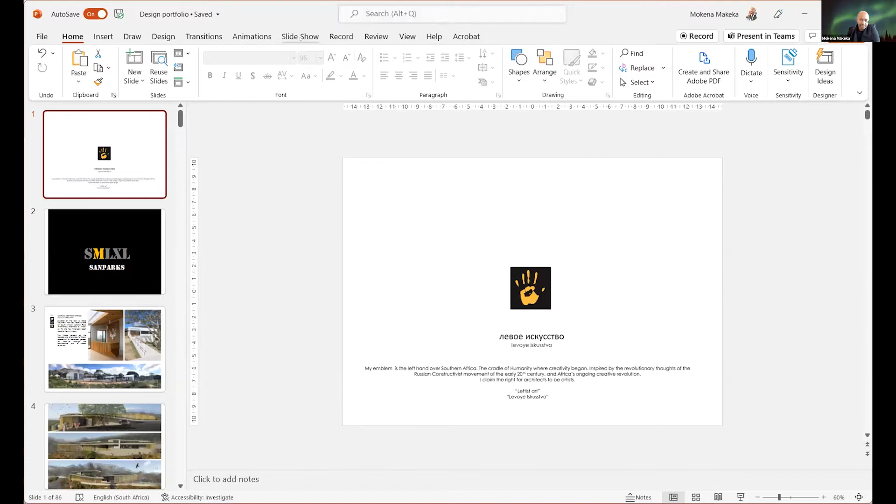I thought that I would locate the discussion really in the context of the work that I've done. These ideas are not necessarily definitive about what public space looks like on the African continent, but definitely a particular perspective, and that'll be unpacked as we go forward.

Just to locate my logo, it's a left-hand symbol over Southern Africa, with the country of Lesotho also denoted there. It's partly because in many ways there are arguments that show this is where the cradle of humanity began, and there's a whole lecture that I actually give around the origin of creative thought and abstract thinking and writing, and how that is basically the origin of architecture if we think about Plato's cave, etc.

But really what anchors it for me is this phrase "Levoye Iskusstvo," which is actually a Russian constructivist statement, meaning leftist art. It came out of the early 20th century, and it was really a statement about the right for architecture to be radical, to be inventive, to be provocative, and to be very thoughtful.

Obviously this came on the back of the Bolshevik Revolution, and I thought there were many similarities between this and my experience in post-1994 South Africa, where we were caught up in this wave of trying to reinvent a South African identity, and to many extents contributing to the larger puzzle of what an African identity looks like, particularly in terms of artistic production.

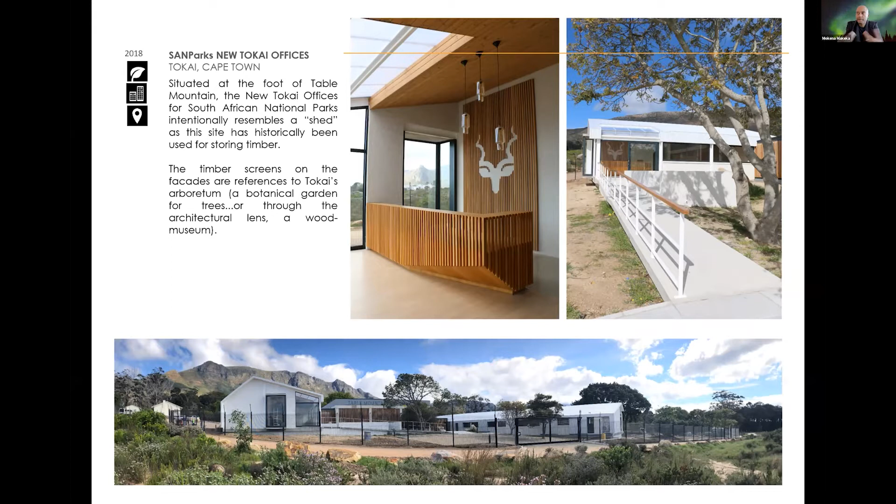Some people in SANParks believe that the building should disappear into the landscape, that it shouldn't be visible, because that would be the appropriate public gesture. I made a counter argument largely around climate change and heat reflection. I wanted a white building, which also had a strong relationship to the Cape Dutch vernacular architecture, but more importantly, that to be public doesn't mean to be invisible. So that was another subtext in terms of the architectural narrative.

Eventually, we found that the client felt this was still too organic a building conception, and they had a public debate about what SANParks would look like in the public domain if we pursued that direction. So we came up with a very different strategy, still centered around a courtyard, using rectangular shapes to create both internal and external public space.

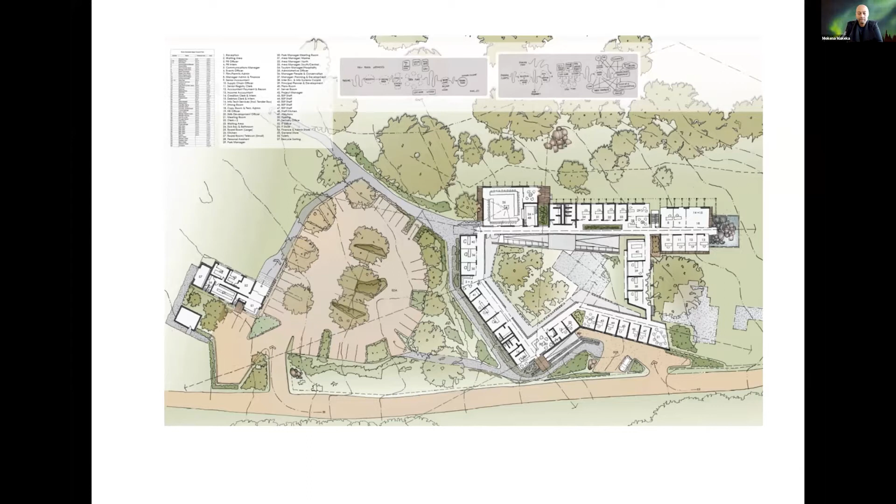Something to mention is that this building is located in a place prone to attacks by baboons, which happens quite a bit. There was an interesting tension because SANParks positions itself as being part of nature, but the subtext of the architectural brief was actually to be apart from nature, closed off from context and somewhat privatized. This project was fascinating because of that tension between public and private.

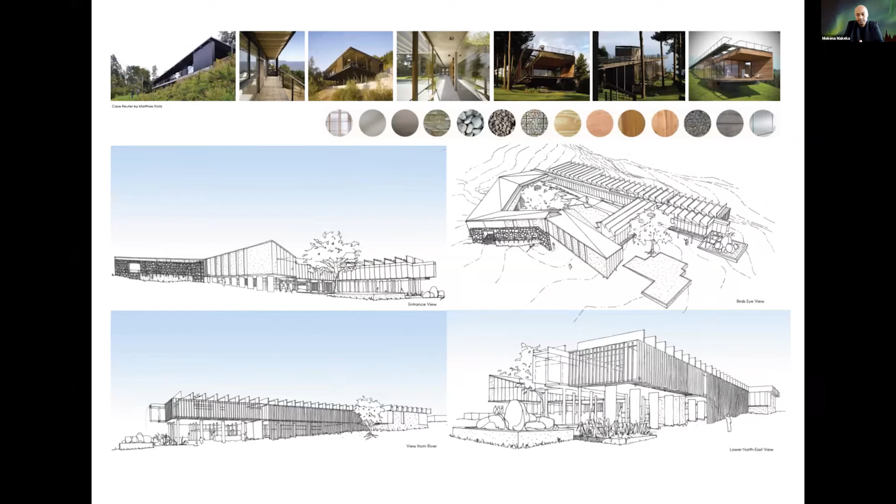This is design iteration number 2, where you can start to see the geometries and language of the building take on a different cadence, still very much an abstract linear element in the landscape. That was an interesting journey from an institutional point of view.

The next project I'll share is MODILA. I founded this Museum of Design, Innovation, Leadership, and Art a couple of years ago. It was a precursor of another museum I'll share shortly. The argument was about how we take public art and public architecture and project it through a museum of design, particularly because Africa globally isn't necessarily associated with design or museums that project the future.

When people think of Africa, they think of Africa in the past, not in a future sense. So what I decided to do quite deliberately was be provocative about these sorts of tropes.

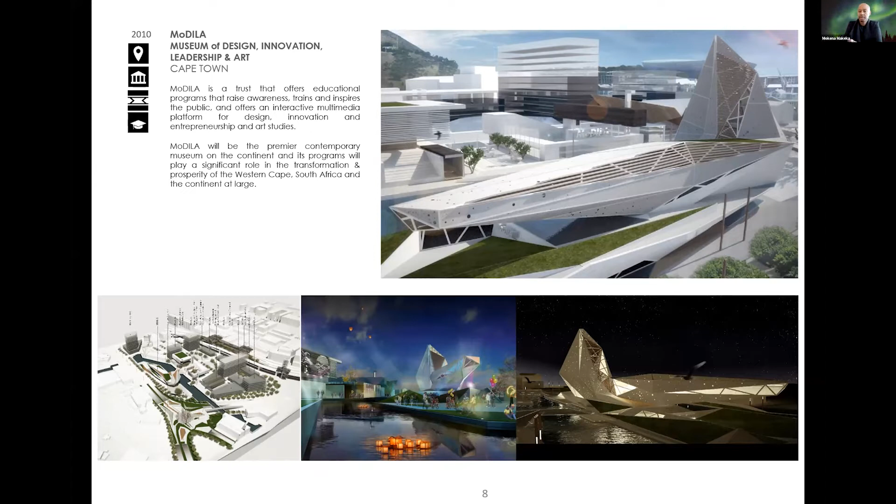The building was inspired by an African star constellation, the Silema constellation, which was pixelated and run through a parametric program to form the apertures on the building. The form is a crystalline structure, reflective of the crystal granite composition of Table Mountain. I wanted to make a deliberate statement that architecture in Africa doesn't have to be nostalgic or trapped in the past—that we can claim the future through our architectural production.

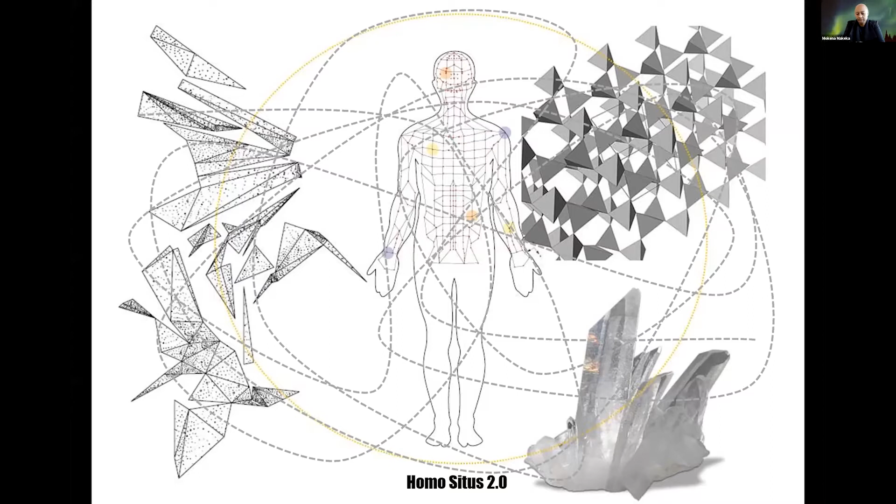This phrase, Homo situs 2.0, comes from an amazing Moroccan philosopher who unfortunately died, Zaoual, who spoke about Homo situs—the idea of situated man, or situated humanity, that what makes a human being is their specific context and location. I took this idea and overlaid it with the question of urban acupuncture at the scale of the body, while imagining the body also as the city.

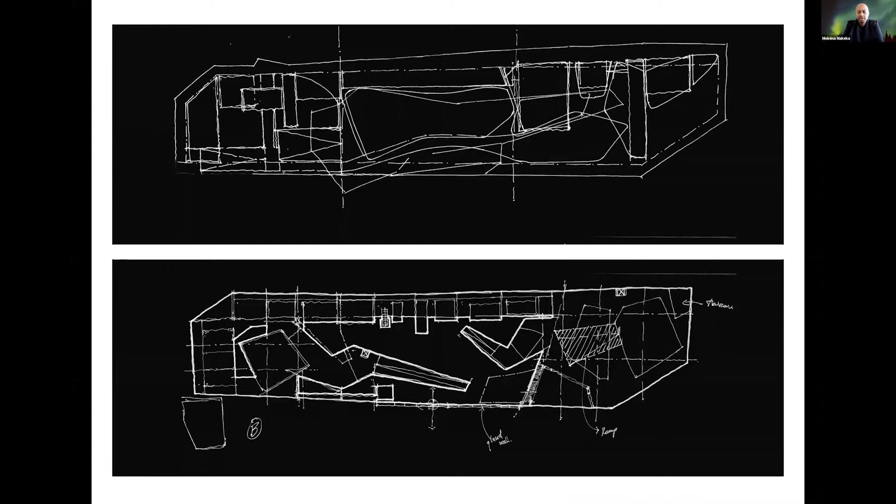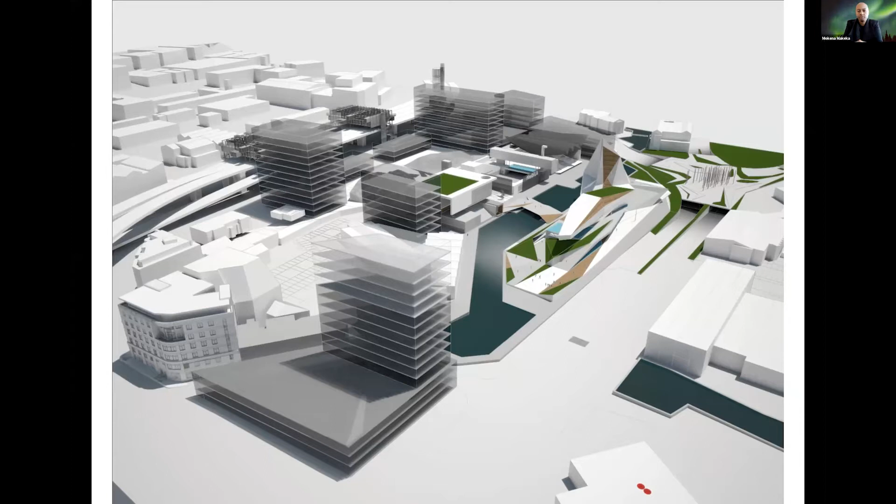These fractal, unfolded geometries coming from the crystalline structure became a determinant behind the design. The layout sits on a very narrow site, roughly 45 meters wide by about 220 meters long—very linear conditions. The interior spaces are a series of fractal geometries occupying the internal space.

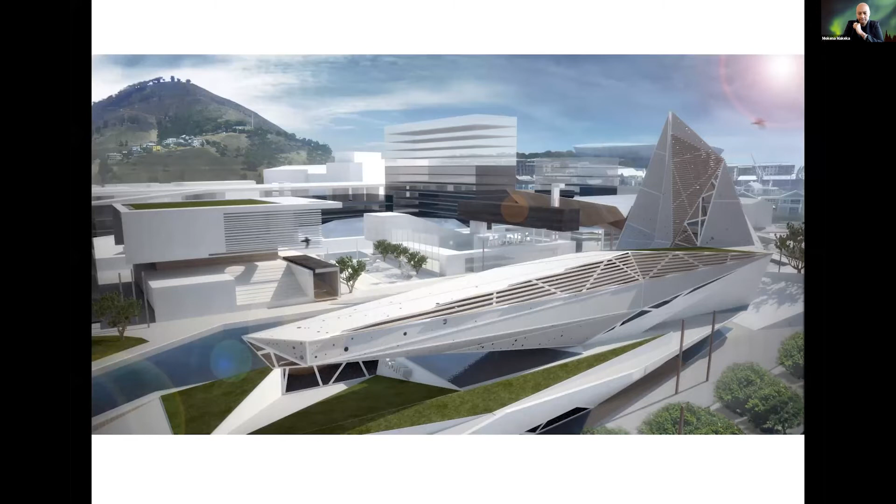Surrounding it, I developed a more traditional urban design framework of buildings that would offset the cost of producing the museum. There was a whole business exercise looking at how much revenue could be generated by unlocking real estate in the surrounding area, and how that capital could subsidize the museum itself. Here are some close-up renders of the building, and that's it in context on the site.

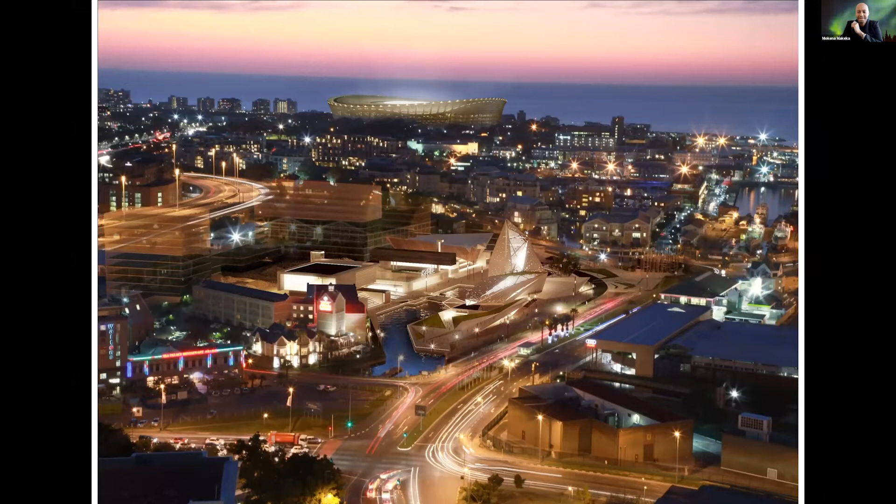The landowner chose to put up an office block on the site, so you're not able to find this building there. This is one of these interesting explorations of the architect, which didn't realize fruition.

The next one I wanted to share is the East Pier Precinct. This is a portion also in Cape Town, close to the V&A Waterfront, which is probably Africa's most successful tourism facility, with millions of people coming there every year—more than come to the pyramids in Giza, which maybe speaks a lot about consumerism and our conception of public art and heritage, but that's a different takeaway.

With this opportunity, this part of the V&A Waterfront, the waterfront as a whole, was always seen as separate to the city, not part of the public realm. They on hand said that they actually see themselves as an extension of the urban fabric. So when this opportunity came up to create new infrastructure at the tail end of the harbor, it started to trigger opportunities for what a new public building could look like.

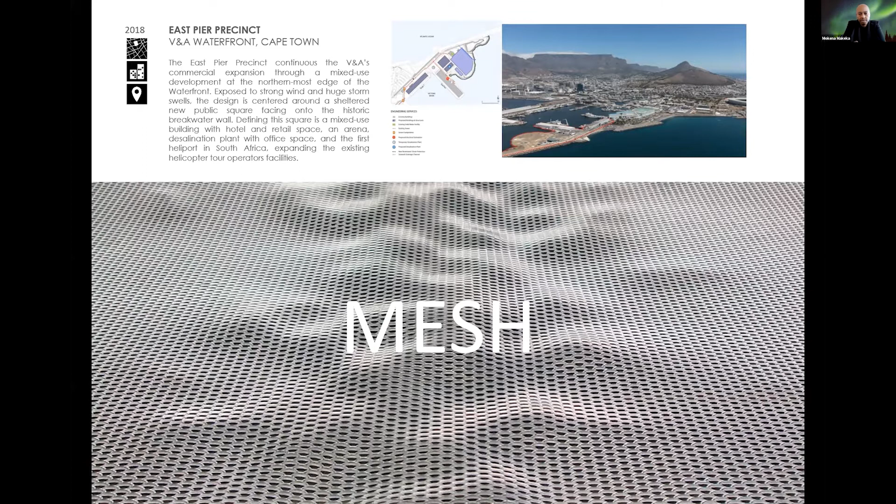I was asked to design a theater multi-purpose facility that would essentially extend the public realm right to the edge of the water. So there was an urban design framework, as you can see, with different components and activities that I'd allocated.

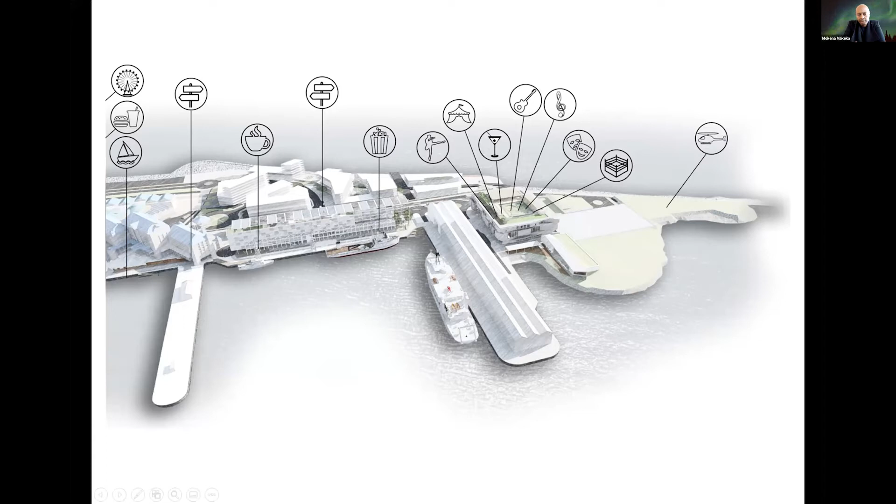Here you'll see the building on the right-hand side, which I called Scenarium. Scenarium was also this play on the notion of seeing and being seen. So I said it's not an auditorium, it's not just a music hall—it's a Scenarium, but it's a place of performance and engagement.

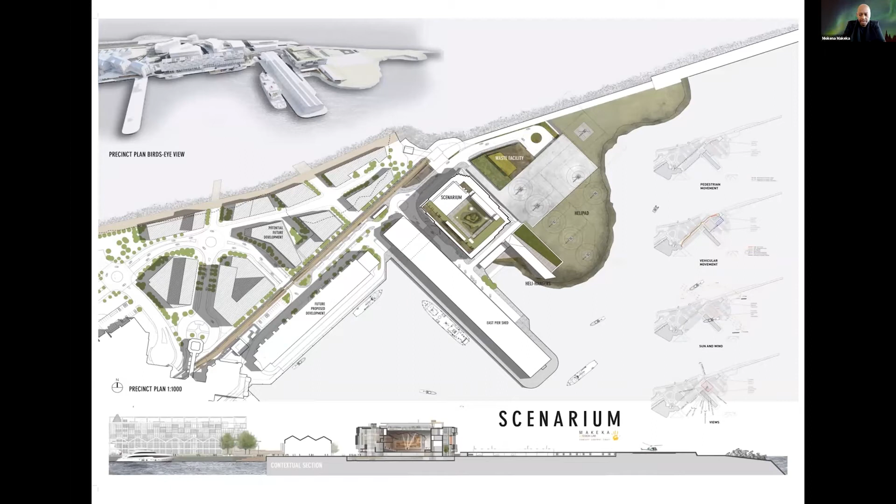The way this building works is that it essentially has a skin, a sort of brise-soleil that wraps around it, but it's actually fractalized—partly because there's an adjacent helicopter port next to it. So we had to break down the decibel volume of the helicopters so the interior spaces could still be functional, and there's a series of unfolding spaces within the design itself.

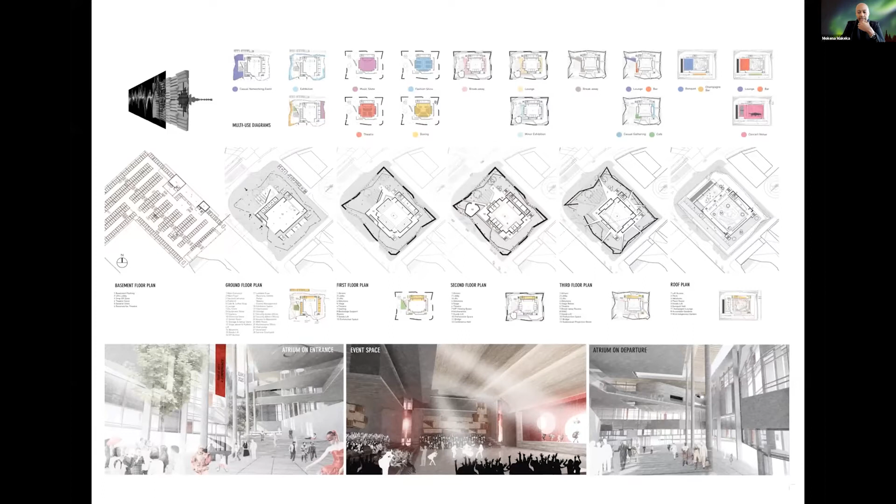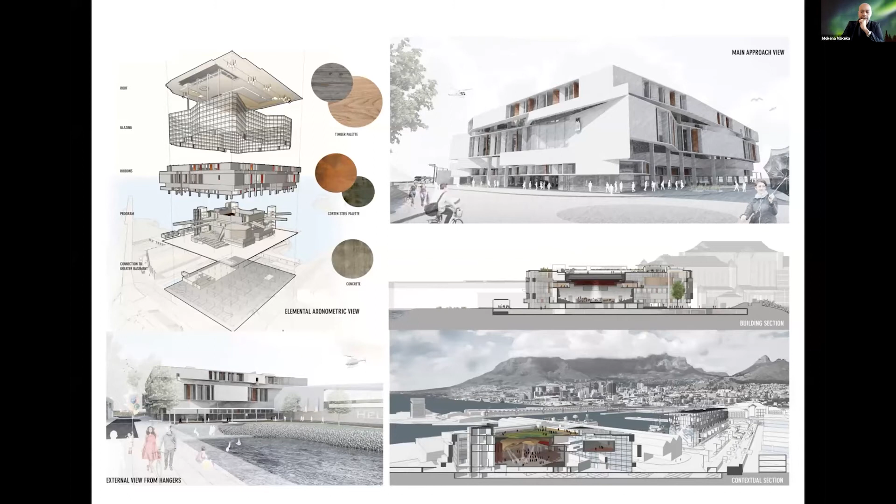Greenpoint Stadium—now, I was also shortlisted to do a design for the World Cup when South Africa was hosting. As you know, every country gets the opportunity to either refurbish their stadiums or create new ones. Cape Town decided to create a new one, and we were part of a shortlisted competition.

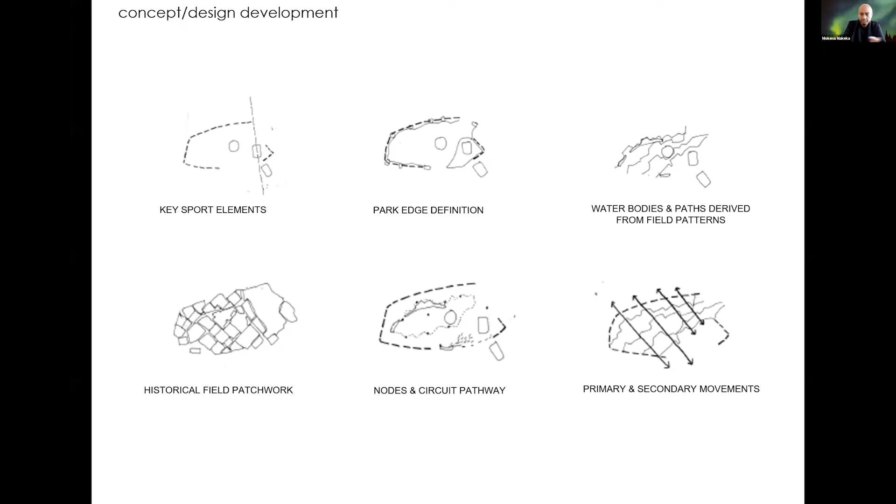The site was quite interesting because Greenpoint Common, if you will, was a site with a whole range of histories. It was used as a concentration camp during the time of Queen Victoria, a place of lots of conflict where indigenous people were also held against their free will. Currently it was a marketplace at the time, and it also has this relationship towards Robben Island.

Robben Island is fairly famous in South Africa's landscape because that's the place where Nelson Mandela and many other people were imprisoned—not just recently, but it's always been a place of imprisonment for the last couple hundred years. So this was a site where I was quite intrigued about how we map a stadium and sport in connection with heritage and so on.

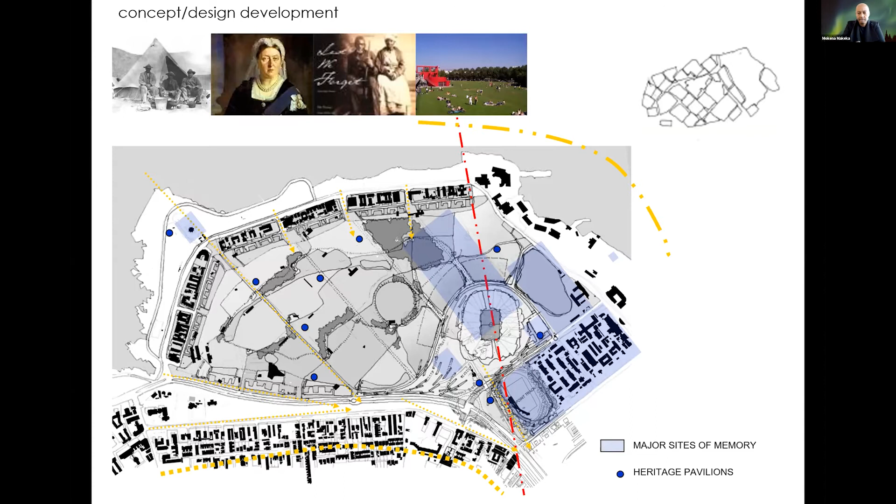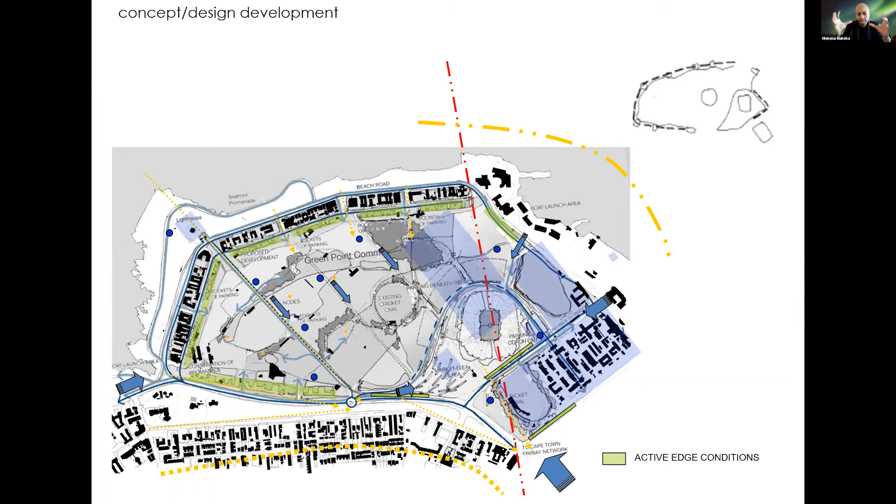It's also about this public space and public imagination of history, which created a framework for how the urban landscape would work. That red diagonal line actually connects all the way to Robben Island. The yellow crescent is where some of the major vistas are, on the outside of the space. Because the whole public park is lined by housing on the outer edge, it creates a sort of cloistered mega urban room, if you will.

And then, of course, a series of green spaces layering. Here's the schematic diagram of what the stadium did.

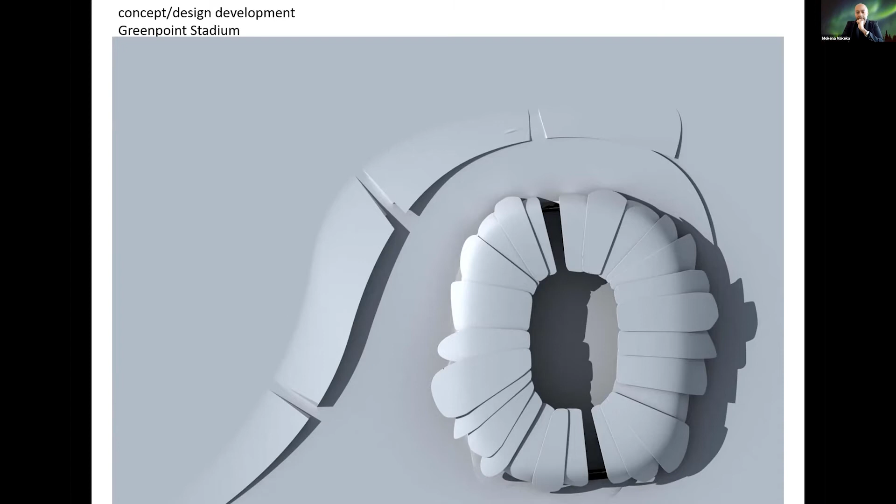It's actually quite a radical design, because what I did is split the stadium in two, so that when you're inside the public arena of the stadium, you're constantly aware of Robben Island. It's a way of connecting the inside to outside. Most stadiums are entirely enclosed spaces—they don't have a relationship to the context once you're inside, because of the importance of the spectacle.

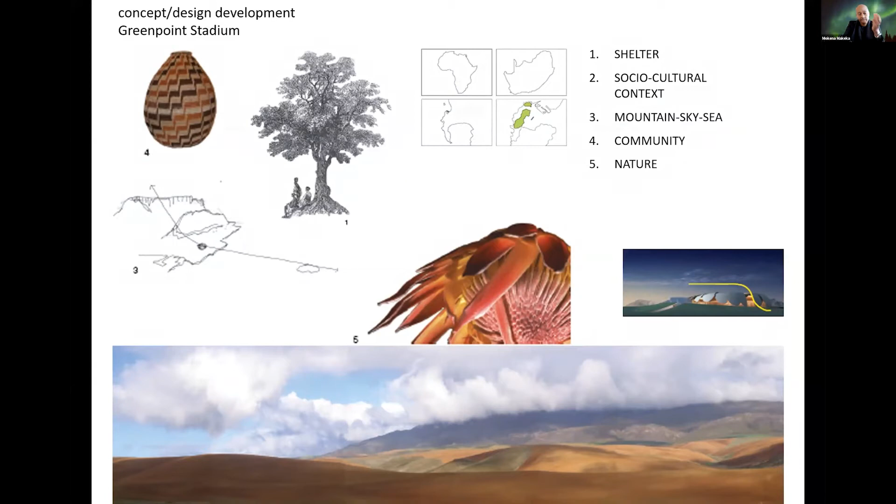The form was inspired by the protea flower, which is the national flower of South Africa, the rolling landscapes, the notion of an African tree which provides comfort and shade, and then the beadwork and craft work. I came up with this concept of these leaves, like the protea leaf, that creates inside and outside space.

On the outside of the space, underneath the raking of the seating, there's an opportunity to have a market and a marketplace. So you could still have sports happening, but the outside of the facility becomes this space of public interaction. There you can see the cut in the building where the seats have been removed, and the timber slats continue to give a sort of filtered view inside and out.

That's the overall impression of what the stadium would have looked like. I think in many ways it starts to challenge this conception about what is urban, what's African, what's architecture, but also what is history.

Next project, and I'll move on fairly quickly because I'm conscious of time.

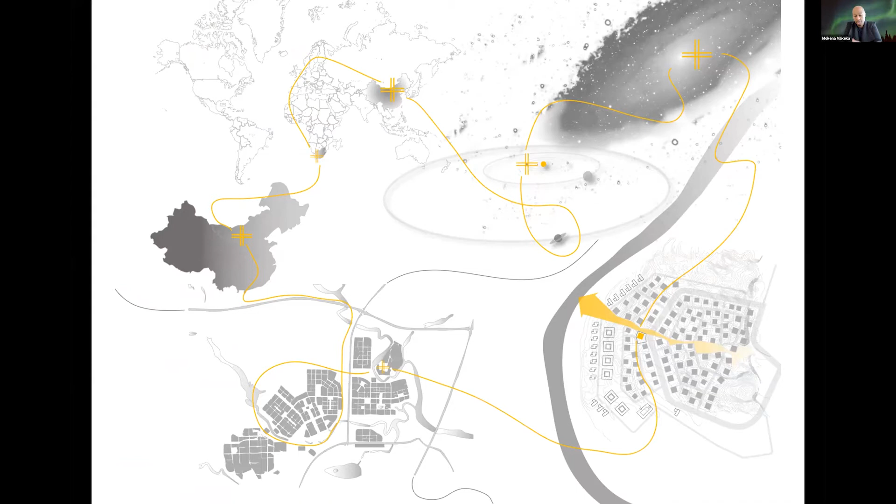I was invited by Herzog and de Meuron, alongside 99 other architects, to design a villa in Inner Mongolia a number of years ago. Quite an amazing project, actually. One of the things that struck me about this project was the creation of a new city. ORDOS is a new city from scratch, and it had this sort of housing component. So how do you create a new public domain in a city which did not exist before?

One of the things I did very early on—here you can see the rectangular form, and that gray ribbon that pulls to the side is the public realm. There was a lottery that was held, and I was lucky to actually find a site adjacent to the public realm. What I wanted to do was invert the design.

I'm not sure if you know about traditional Chinese residential construction—they have what's called a hutong. A hutong is basically a courtyard form in which the internal part of the courtyard acts as the public space. In other words, all the adjoining residential units come out into that courtyard, and they see that as their living room. So that public space is almost a private space in the Western sense, but it's a public space in the Chinese sense.

I was intrigued by this idea because from around 2006 to 2010 and so on, Beijing and other cities wanted to modernize, so they decided to remove these hutongs. They were starting to erase their historical fabric, which I thought was quite sad.

So I decided to take this pavilion and pivoted, saying I'll create a contemporary version of the hutong. It's essentially a C-shaped architectural form in which the internal space, which from a Western eye might seem private, is actually public.

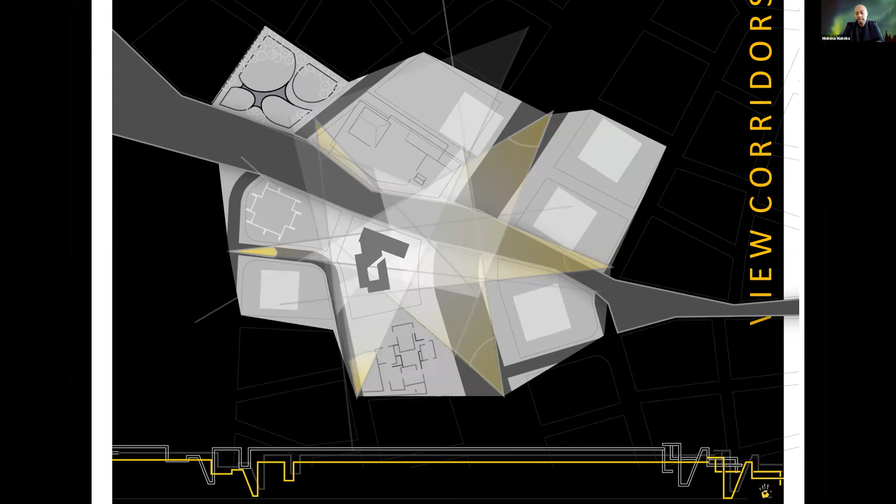I pulled through a pedestrian desire line all the way through the building, and that made it a bit of a political statement. You can see the gray ribbon as described, the little gray Cor-Ten block on that side, and the gash going through it—that was to encourage movement.

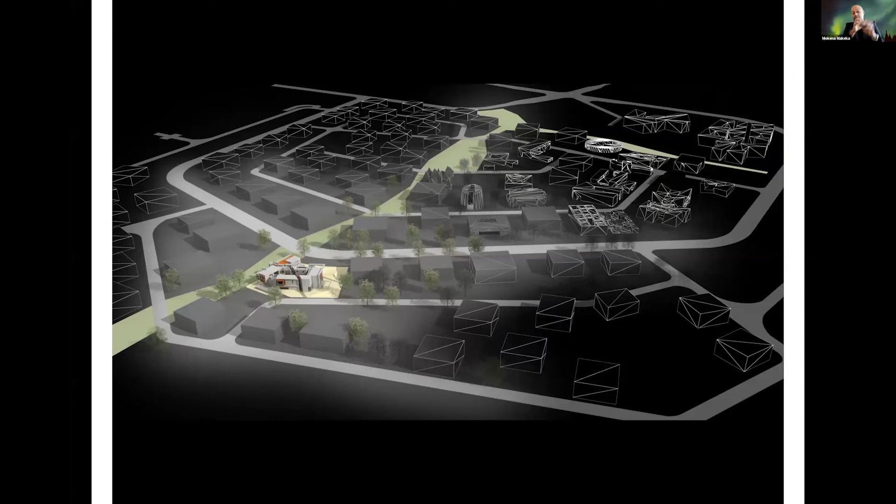Then I spoke with my neighbors, my other architectural counterparts, about connecting their entrances through my building and across to other spaces. So it became a very different sort of urban strategy for what a building could look like.

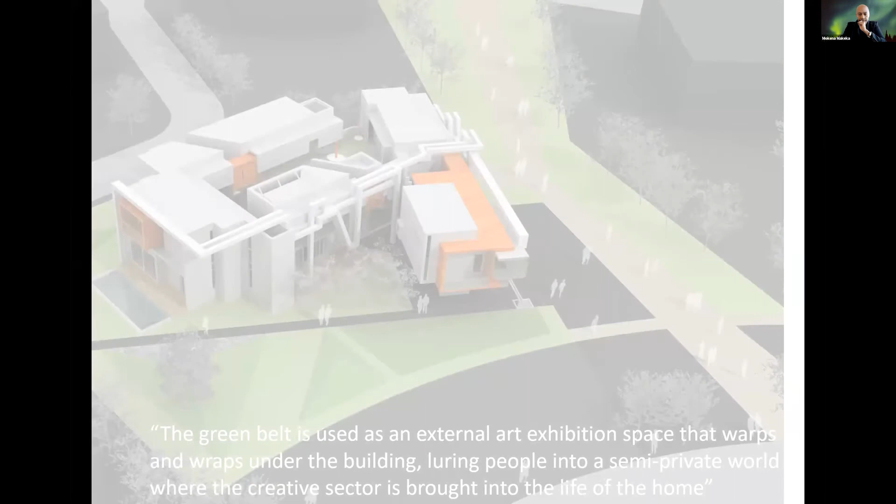You hear the statement: the green belt, which is the public realm, is used as an external art exhibition space that warps and wraps under the building, luring people into a semi-private world where the creative sector is brought into the life of the home. The whole bottom floor of this house is conceived as an art gallery, a way of connecting art and the public and getting movement through the building, while the private activities happen on the upper level.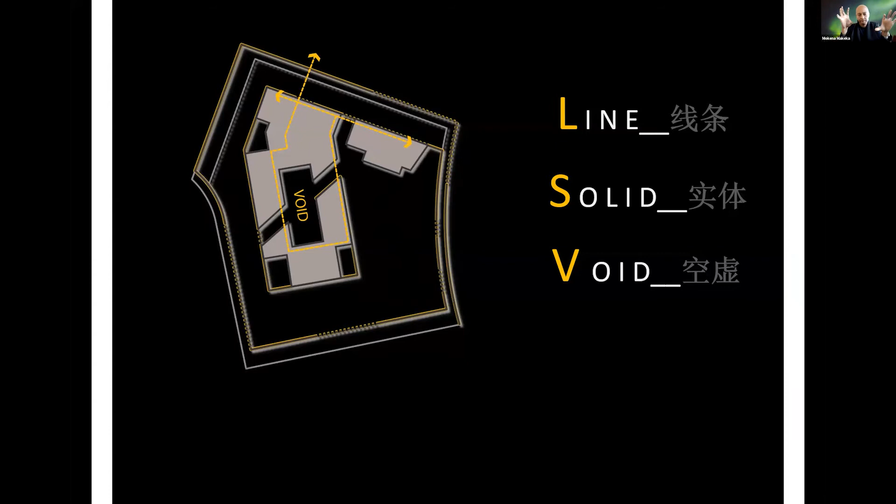The concept of the building was line, solid, void. That was how I split up the components of the strategy. There you can begin to see, in terms of the lining, how the public and private realm begins to intersect with the forms and the volumes, where public and private are almost always in intense adjacencies, not seen as separate and cloistered, but actually continuous.

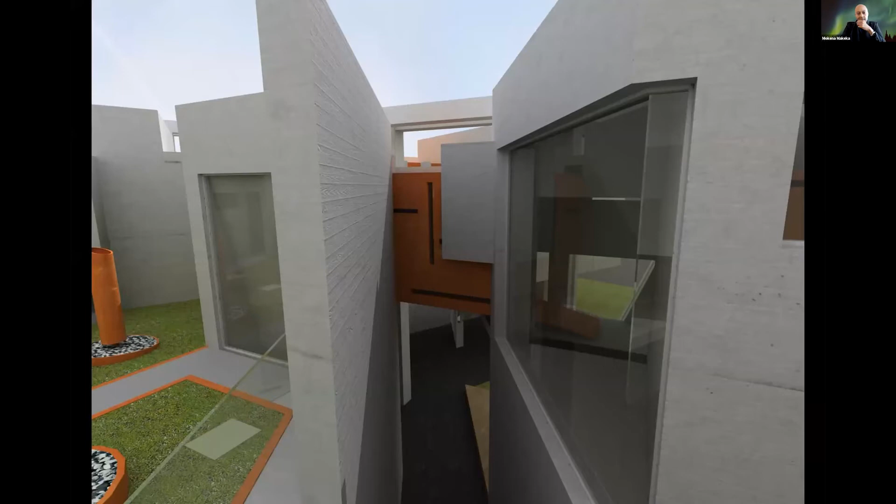And here's that view of that space, and here's a quick section through that part of the volume, although the actual gap is running in this sort of direction on this view.

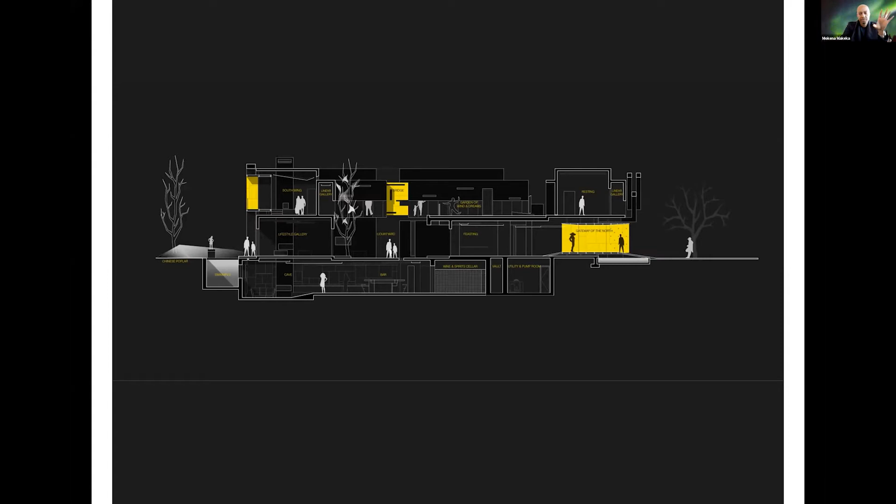This was a really fascinating project because it was a statement about the erasure of China's past. It paid homage to the Hutong structure, which has been an almost iconic form of residency for hundreds of years, but at the same time was very much a modern building in terms of how it was structured.

This was curated by the world famous artist Ai Weiwei, who was the curator of this gathering. You can begin to see the distinctive design there. I was one of 2 architects from Africa out of the 100. It was really fascinating looking at the mosaic of how different architects from around the world are thinking about urban form and residency.

In Khayelitsha, which is a township in Cape Town, I was asked to do a multi-purpose community center. Khayelitsha is one of our largest slums in Cape Town, experiencing ongoing development but still really challenged in many ways, as with slum settlements throughout the continent.

I decided to do a number of things with this project. One was to make a very clear architectural investment in that landscape, because the government would underinvest in these facilities since they don't pay much tax. So there was a very minimalist approach about how you intervene in townships.

These townships are vulnerable to fire annually, as well as flooding, and also a sense of disconnect with the city and government. So I wanted to make a building that felt resilient, that felt strong, that would sit in the landscape, that wouldn't collapse under fire, and that was also a sign of commitment. So the strategy was somewhat different.

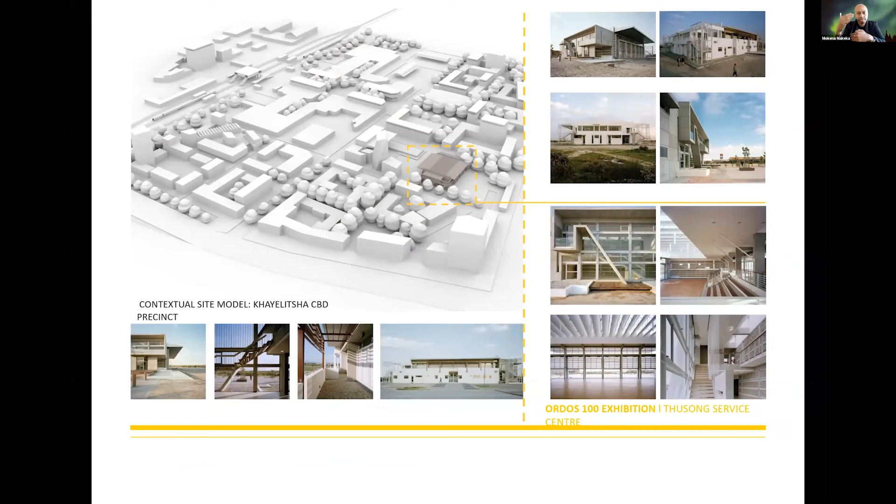I did an urban design framework because when I was given the site, there was no coordination about what it would look like. So again, I did what I call anticipatory architecture — about how you make a building that creates public space, but also gives clues for other people to develop their own public spaces.

Here you can see the off-shutter concrete facade of the building on one side. When it was designed, there was no need for any fencing, which was almost unheard of — everybody said you need fences in the township. I said no, we need public space in the township. So it was much more about that sort of thinking.

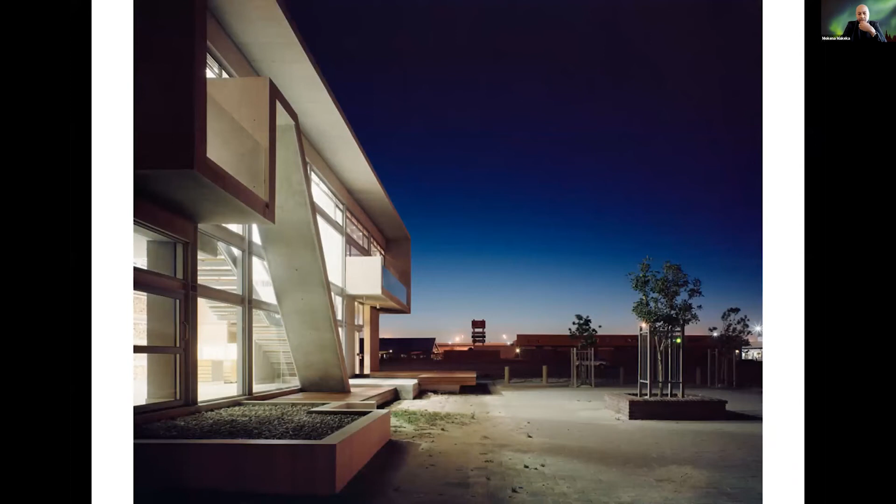That's a night shot. You can see also no burglar bars, no protection. Yes, it was shatterproof glass, but I also wanted the urban experience to feel somewhat seamless.

That whole facade actually opens up so that the public square you're standing in flows into the building. It was a statement that the building could participate in doubling public space by having one facade that actually dematerializes. That's a shot of it in the evening.

And then next project, and perhaps more recent, I was asked... I just wanted to say that with this particular project, I'll actually keep it on here.

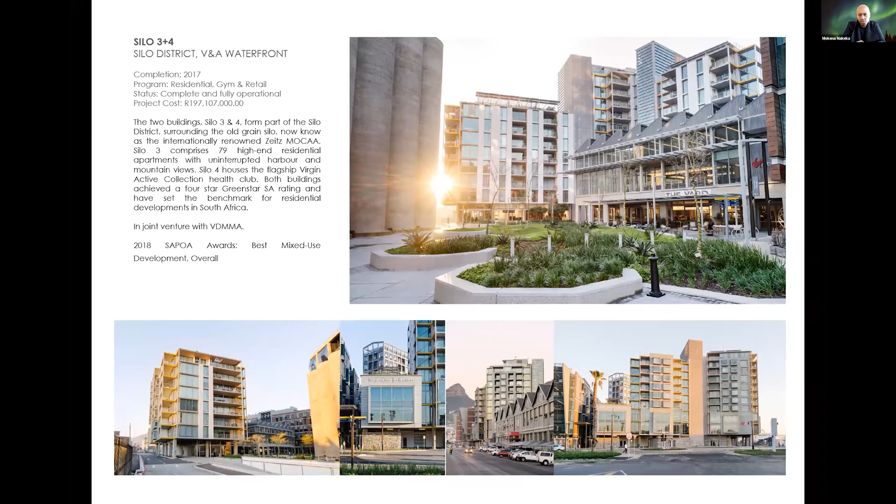That museum I mentioned earlier, the Museum of Design, actually triggered a lot of thought about a more contemporary museum for Cape Town, to the point that Thomas Heatherwick was asked to do a renovation of the silos. There was this growing understanding that museums can be contemporary, so they selected him as the architect. I was asked to be the architect for a housing unit adjacent to it, as well as an urban precinct planner, with about 79 odd units that we had to erect on that site.

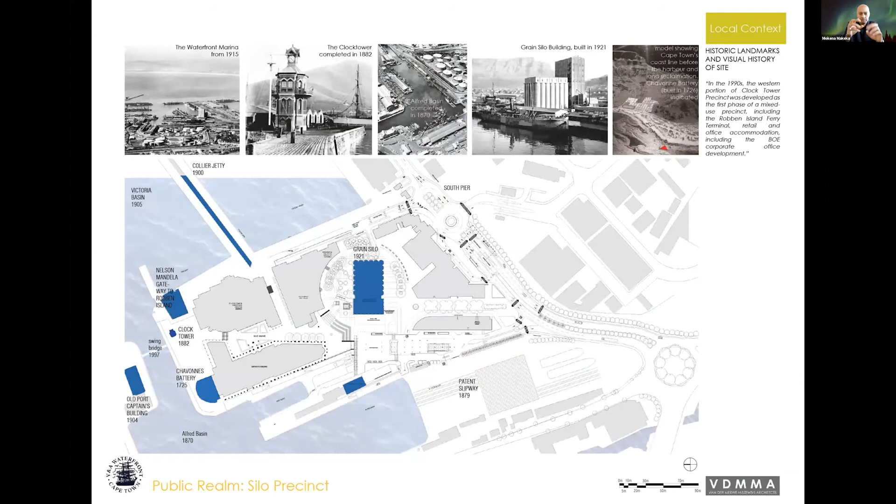What's fascinating about it, you can see the grain silo that was built in 1921, in blue, a very solid building with adjacent components looking at the public realm. I created a Nolli map, looking at all the public spaces both inside and outside the building, and you can see in the central form how originally the ground plane of the museum becomes accessible, and towards the east that building which I worked on also has quite a dematerialized ground plane.

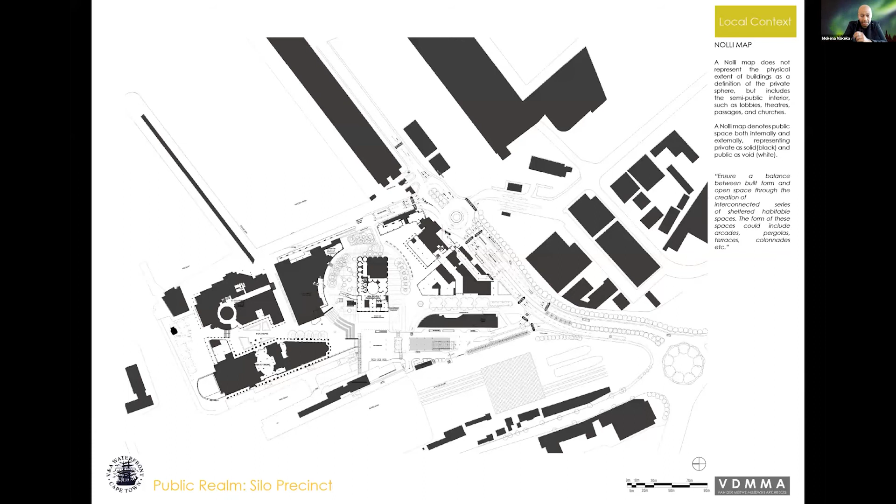A Nolli plan is nothing new, although some people think a Nolli plan is a figure ground plan. There are differences—it's not a figure ground plan. A Nolli plan is actually a public space realm drawing, and I do it on all of my designs because it really begins to crystallize where the project is going.

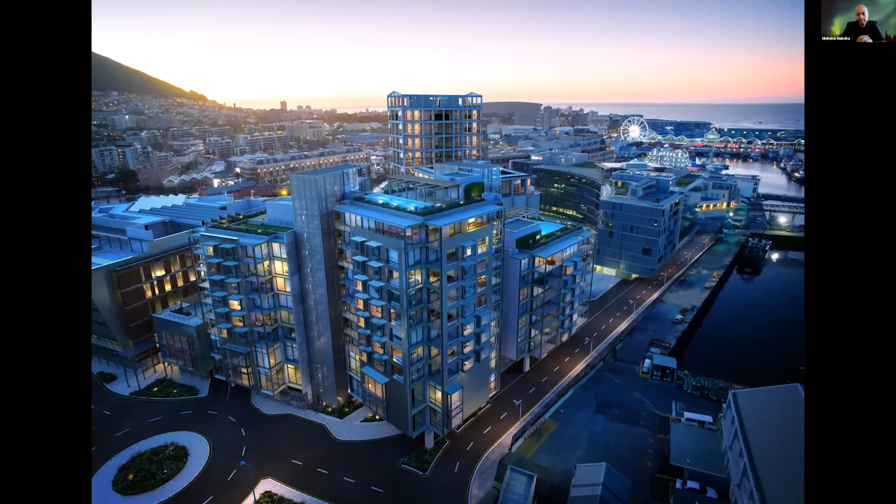Last but not quite least, I was asked to do some work in Madagascar to create an ICT hub for the Ministry of Telecommunications. A really fascinating project, because here we were looking at what an ICT hub could do within the city, and what type of impact it could achieve.

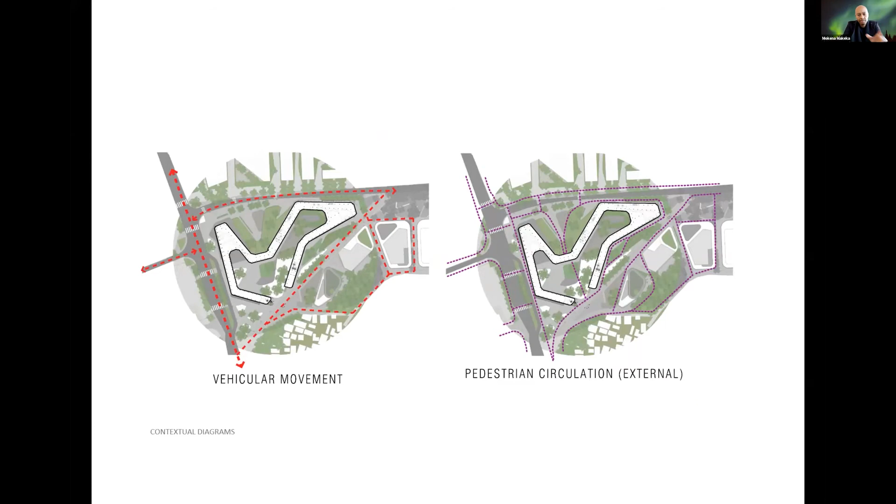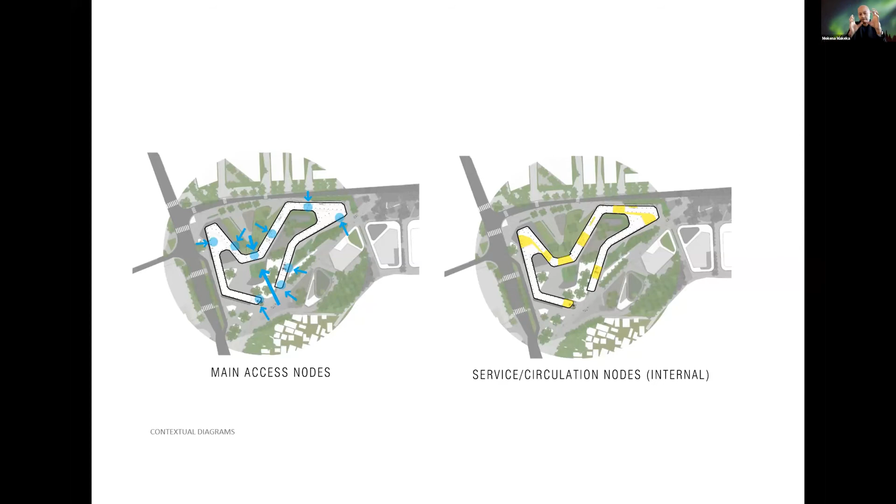The form I created was on a prominent site in Antananarivo, but looking at the pedestrian circulation systems and creating a very different type of urban form, by pushing and pulling the actual layout you create different types of public space—some almost U-shaped, others more linear—which gave a lot of language and diversity to the public space realm.

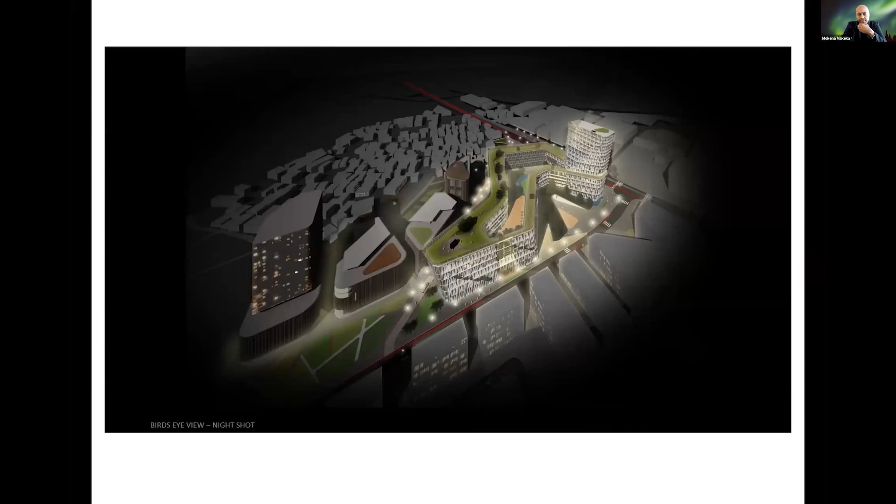There you can see the layout and how we structured it, composed of about 7 different buildings, the main building being the one you can see towards your left. Studies about the skin.

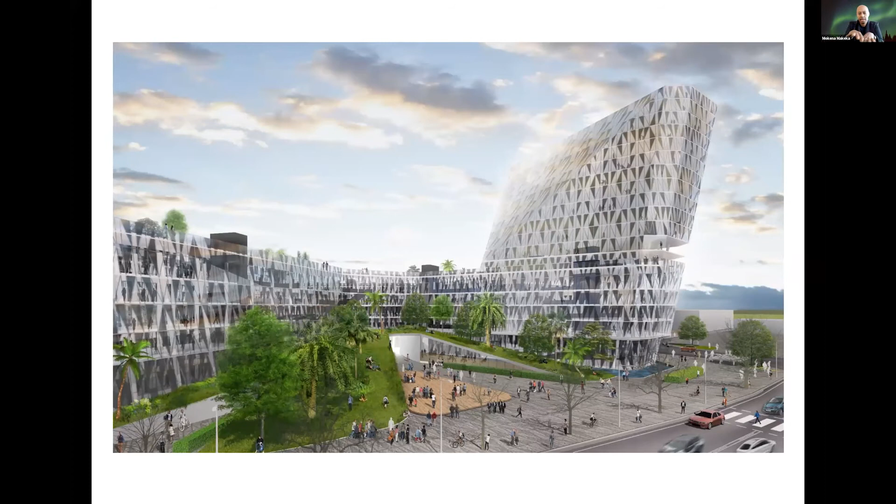Here are some renders of the building, and you can see how the public realm happens on 2 different levels. I decided to elevate one portion of the public realm to the first floor, and another one goes underneath. For me, it's all about providing spatial complexity and spatial nuance to this definition of what is public—it's not a building that hugs the street with a palisade fence and only leaves a sidewalk. In many ways, the sidewalk becomes this super public realm within the building.

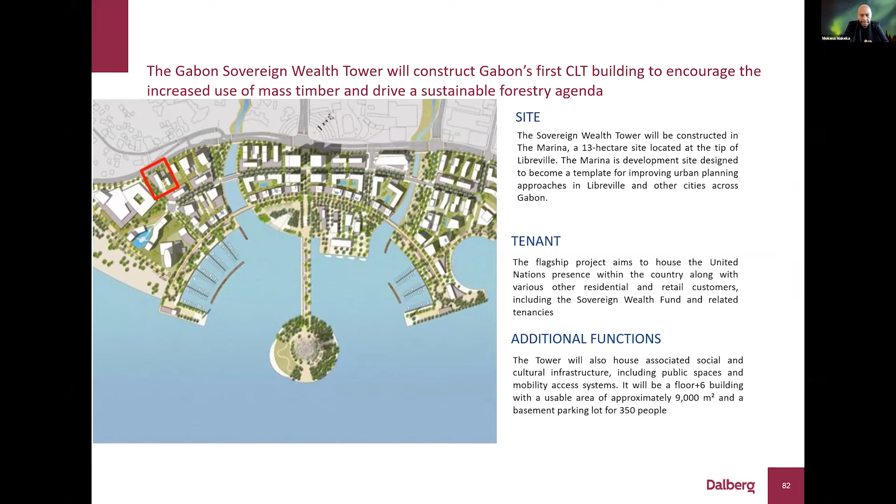And last but not least, the Gabon Tower, my most recent work, where I've been asked to create a tower for the government of Gabon to house the UN. Here, slightly different conditions—it's complex. The UN is not a public entity in the sense that you have diplomats, and so on. There are safety and security issues; it's a highly sensitive building.

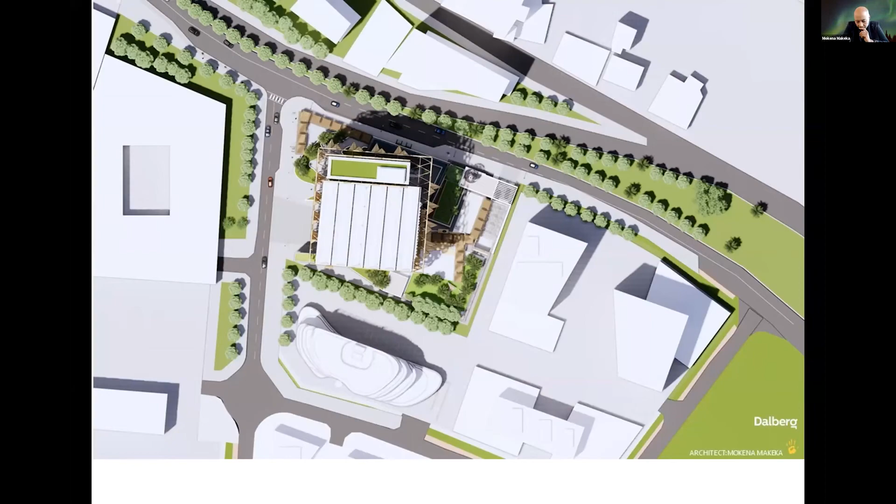So what I did here was make a ground plane that was accessible, and the rest of the building is far more private. But what makes this building unique is that I replaced 85% of the concrete and steel with a recommendation for local woods to be used.

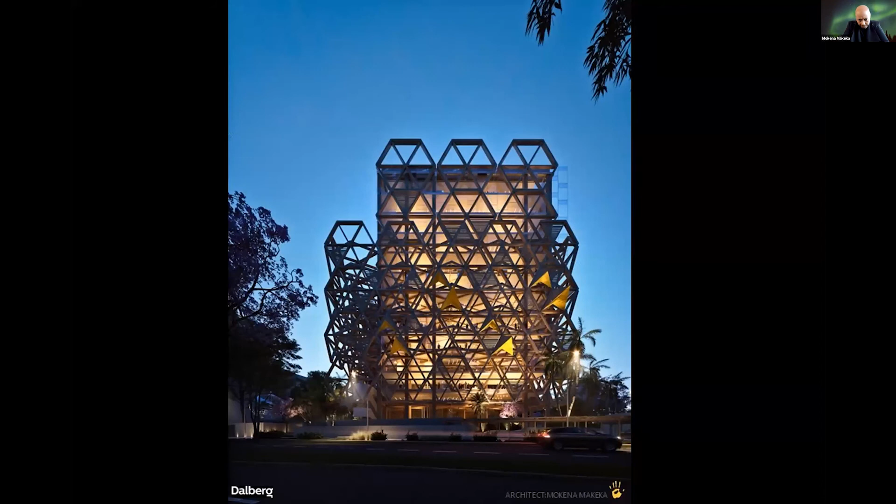What intrigues me about this language of a building is its lattice framework, which I think is an incredible evolution from the heavy, concrete, stereotomic mass buildings that I've shown earlier in my portfolio. But what's interesting about this project is that the UN is another type of public space.

It's another institution, another global body in which conversations about different forms of public space are being convened. What I've tried to demonstrate in this presentation is that public space takes on a number of dimensions: it's institutional, it is urban, it is architectural, it's also political, and it's also historical.

From that perspective, we can start to deepen understanding of what this means on the African continent. I think it's the layering in different locations that makes it place-specific, going back to my point about Homo situs, and also what makes it uniquely African. And I will stop there.